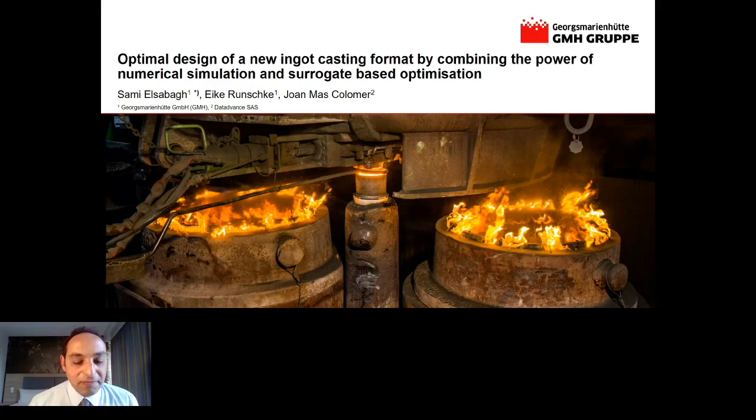Who are we? We are a steel-making plant. Not only a steel-making plant, but we are a big group with a lot of producing business units. We are 100% privately managed, working internationally in more than 50 countries. Due to the 100% use of steel scrap in the electric arc furnace, we have a low carbon footprint in our steel production. With 6,000 employees, we have a 2 billion euros turnover.

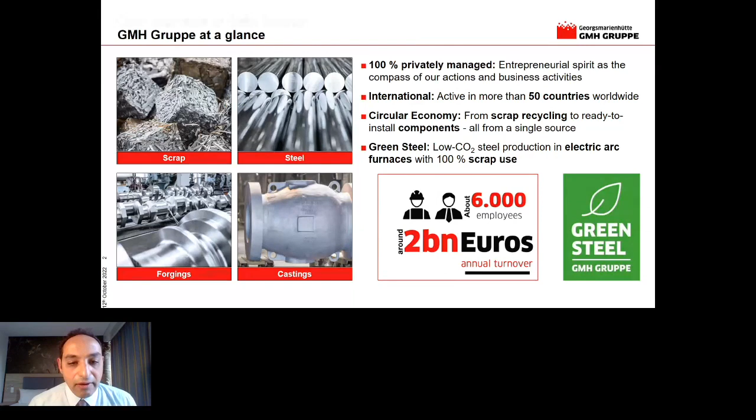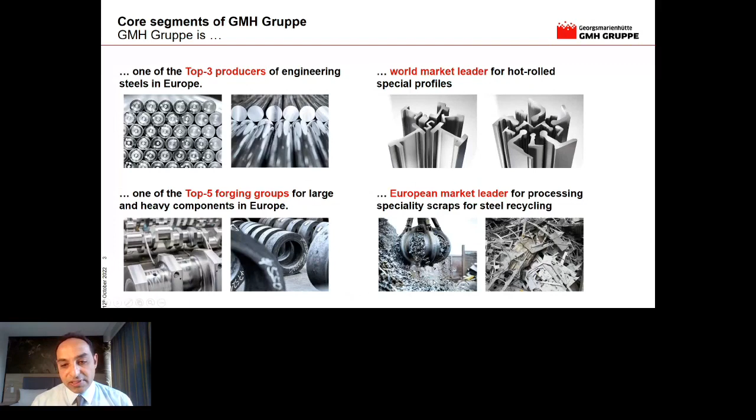We are a producer of engineering steel and special profiles, and we produce also heavy components, which are castings or forgings. As well as that, we are specialists for processing specialty scraps for steel recycling. The markets where we are active are mainly automotive, energy, transport, logistics, railway, consumer goods, and food industry.

Like the label of Intel Inside on your computer, you should say one of 4 or 5 cars you can have the label GMH Inside. 4 or 5 cars contain steel made by GMH Gruppe. We are located, as Laurent introduced, in Germany by Osnabrück as a steel maker. These are our locations worldwide.

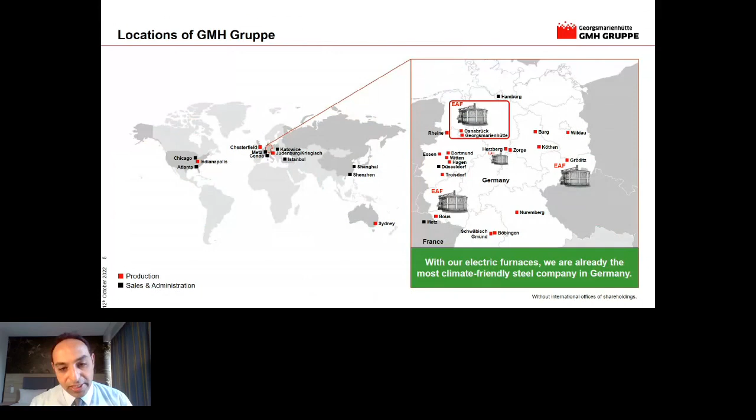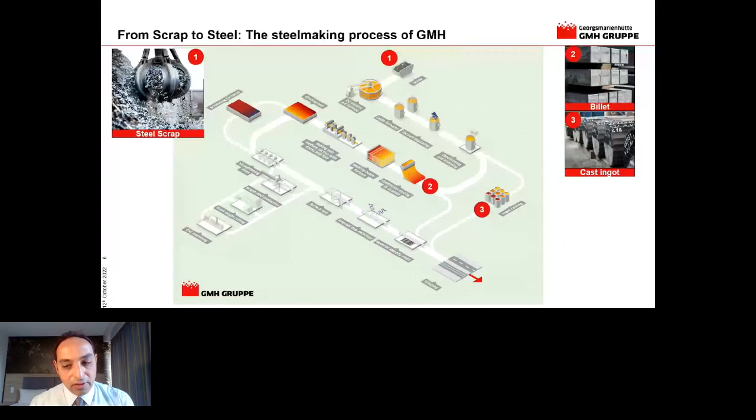In our process locally at Georgsmarienhütte GmbH or GMH, we produce our steel by recycling steel scrap in the electric arc furnace. The liquid, after the secondary metallurgical treatment, we produce cast billets and as-cast ingots, which are partially going to the customers for processing, but also we produce steel bars in our rolling mill, which are either as-rolled or heat treated or as bright bars.

Our focus today is the ingot casting of steel, where we have to propose a new ingot design for our customer and propose a feasible geometry respecting the process itself and the customer's requirements and constraints. We want to create a healthy part and high metallic yield, and avoid and minimize - that is the very important thing - trial and error on the real product itself. So we want to do a digital optimization with numerical simulation.

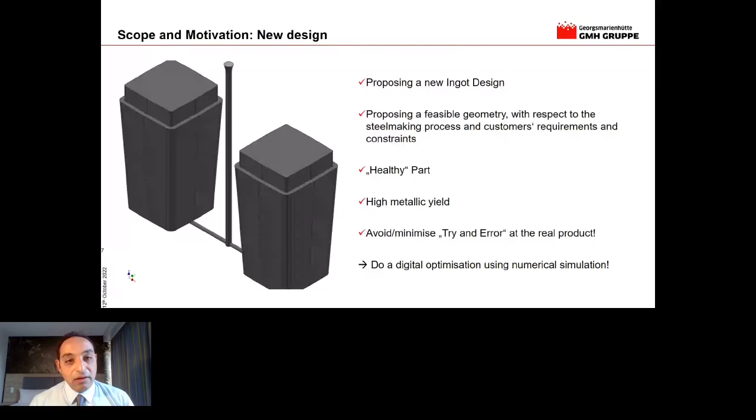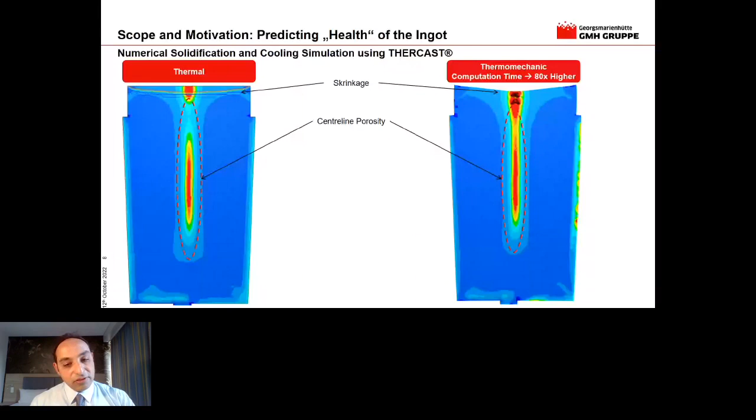Using THERCAST, we can model and forecast or predict the shrinkage behavior of the solidified part, as well as model the centerline porosity. Other attributes which we can model or simulate with THERCAST are segregation, ghost lines, and hot tearing.

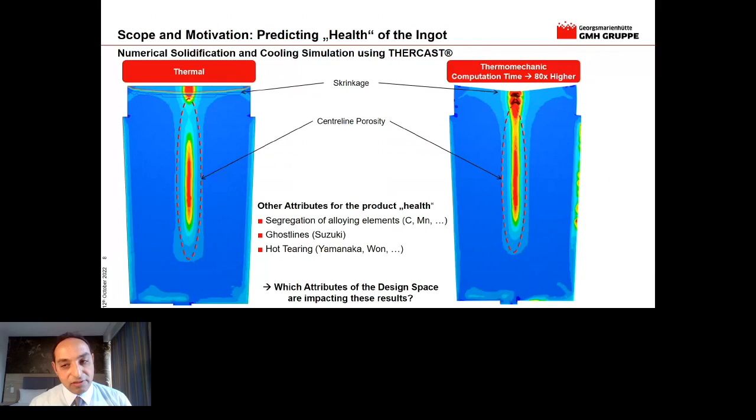But the point is, that is all fine. But which attributes or process parameters in the design space impact these results? That is actually the point which we are talking about. If we have such a simulated part, what is the design space to be investigated?

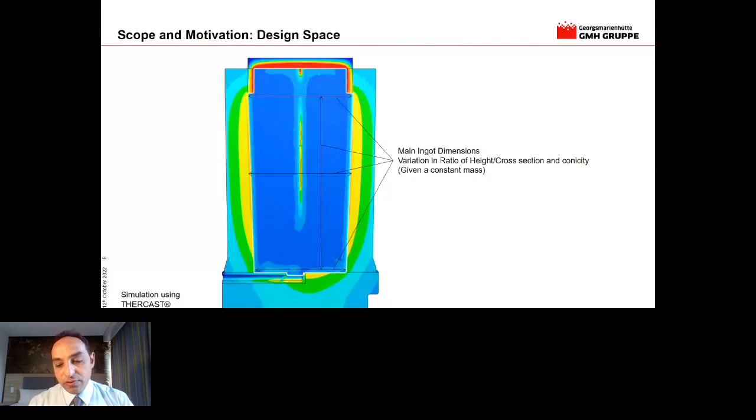The ingot dimensions: given a constant mass, we speak about 5 tons, 10 tons, 30, 40, whatever tons. If you vary the dimensions, you vary the behavior or influence of the height-to-cross-sectional ratio, conicity of the geometry of the mold, the riser dimensions, the insulation dimensions, as well as their thermal properties, given process data like the steel grade, the mass flow rate during pouring, superheat, and so on. That's all nice.

What you see, the colored photo in front of you, is just one single configuration of the geometry, process parameters, thermal properties, and boundary conditions. So we want to explore the design space and optimize this process.

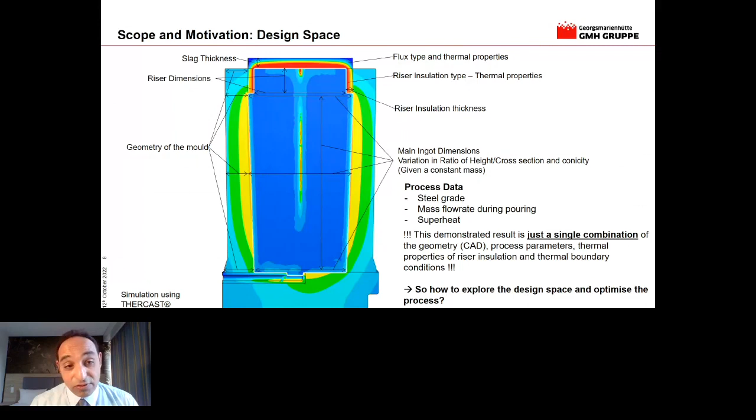How to do this? If we talk about design of experiments, we talk about two-stage full factorial design. Two-stage means that every parameter has a low value and a high value. What happens if I investigate 2 parameters? I have 4 virtual experiments. If I have 4, I have 16 experiments, and so on. So it's getting too much. With the previously mentioned parameters, we are talking about more than 16,000 simulations to be done to investigate this design space

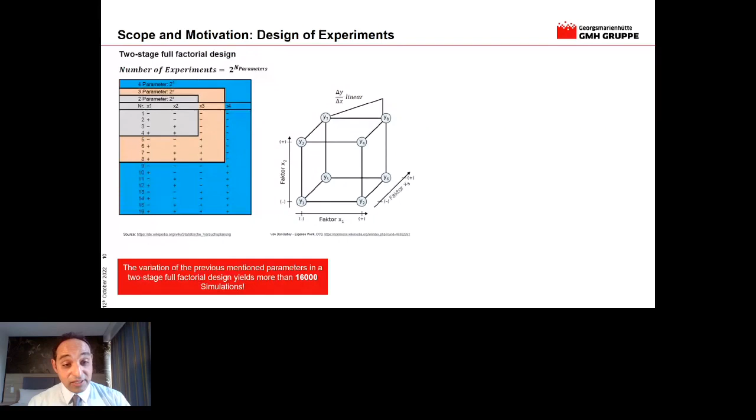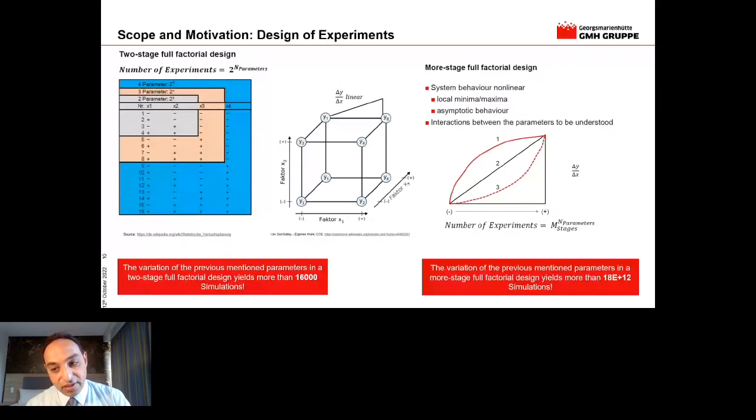just like this. And when we talk about processes with a non-linear behavior, with minima, maxima, asymptotic behaviors, how the parameters are interacting together, then we are talking about billions of probabilities to be investigated. So that's what we did together with DATADVANCE and GMH, to use pSeven as the mind of the whole workflow.

We have Inventor for CAD and THERCAST for the meshing setup and the real numerical computation itself. We consider this as a black box, and pSeven does the design space exploration, gives the parameters, does the control and the triggering of all of the workflow, and gathers the responses at the end of each simulation, all in an automated closed loop.

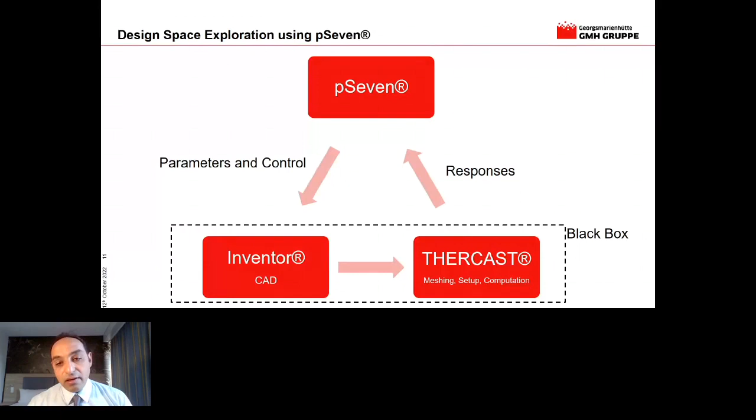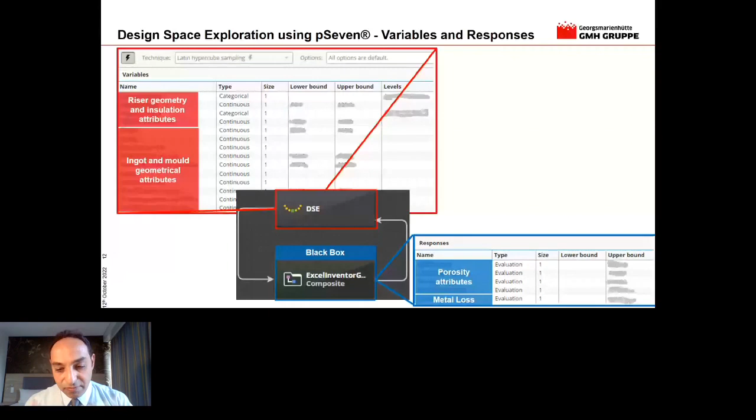And it is done like this: we have variables and responses. Variables like riser geometry, insulation attributes, other geometrical attributes and other process data; they can be hundreds, but you have to define them. You have a lower bound and an upper bound, you can define the bounds, the levels in case of categorical variables, and then send this configuration to the before mentioned black box. Then from this black box you gather the responses, like porosity attributes, metal loss, and so on.

In detail it looks like this. If I look into the black box, we submit the input, the design variables, the CAD is triggered, the geometry is produced, the meshing, the parametrization, the solidification simulation, and afterwards the parameter documentation, data acquisition, analysis, and these responses are gathered from the black box back to the design space exploration of pSeven for deciding the next iteration.

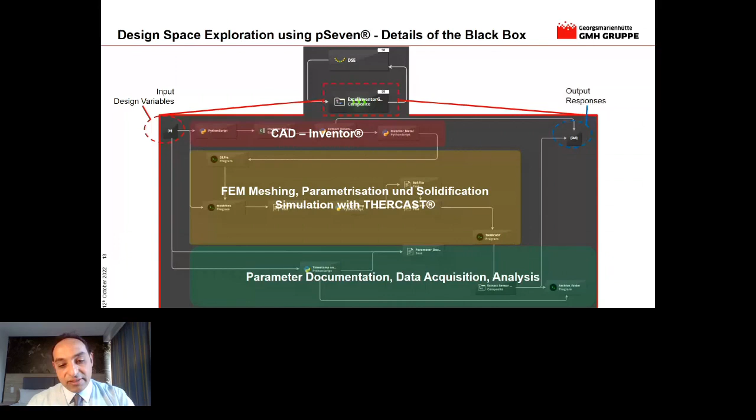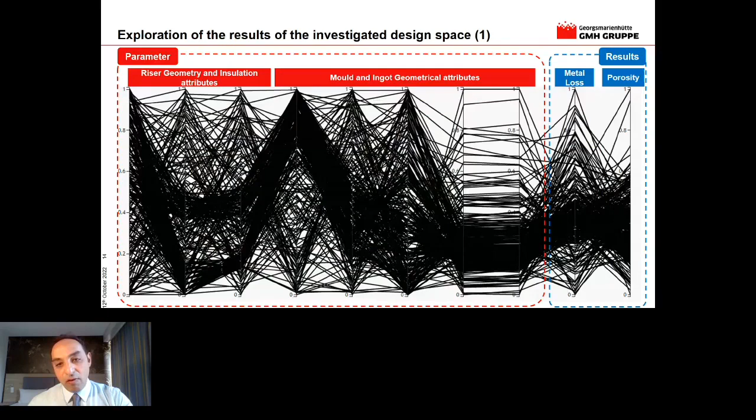And the nice thing: these are 350 simulations done in this workflow, and we have the possibility to explore the results of this investigated design space. We have the parameters which we vary, we have the responses which we gather, and we can have a look and understand what happens, which results are bad in terms of porosity or health of the product, and which are good.

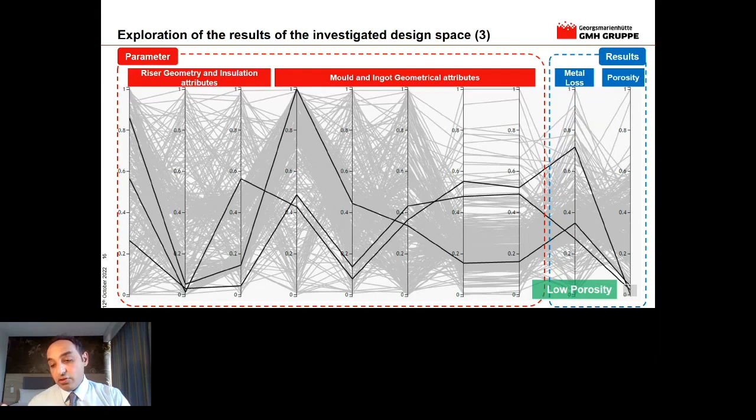And we see that we have the possibility in our optimization to find good porosity and also optimize the metallic yield, and understand which parameters are relevant, how they interact together, and which parameters are not really so relevant, whatever variation we do. That is an important thing for us to understand as engineers. I make hundreds of simulations; how do I understand what I did at the end, all at one glance?

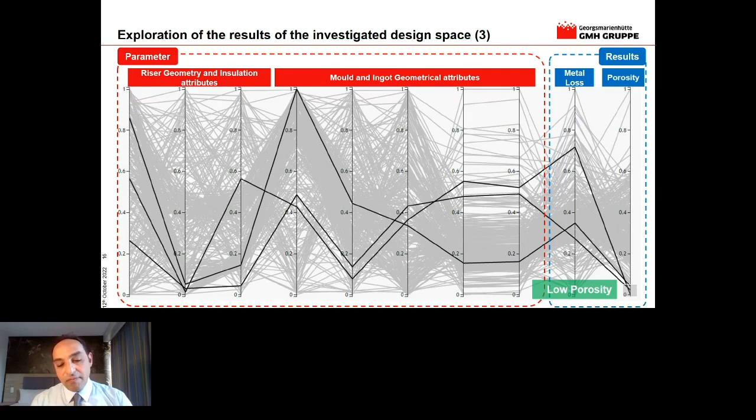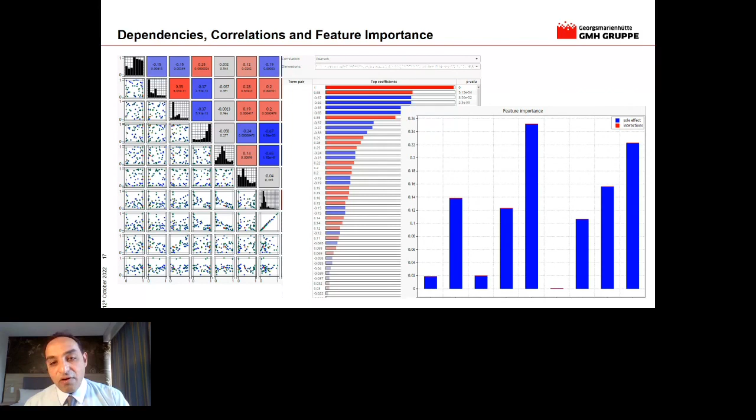Other possibilities which we get and use from pSeven are to analyze the dependencies, the correlation, and the feature importance. Is the investigated feature really important, or can we just neglect it? And understand the dependencies, how they correlate together, and go further and have an understanding and a feeling for what I am designing.

And then we get to the next step, which is more or less the final one, the surrogate-based optimization. Instead of just evaluating the responses, we say we want to minimize the porosity attributes, the metal loss, whatever criteria we have, and get our final design.

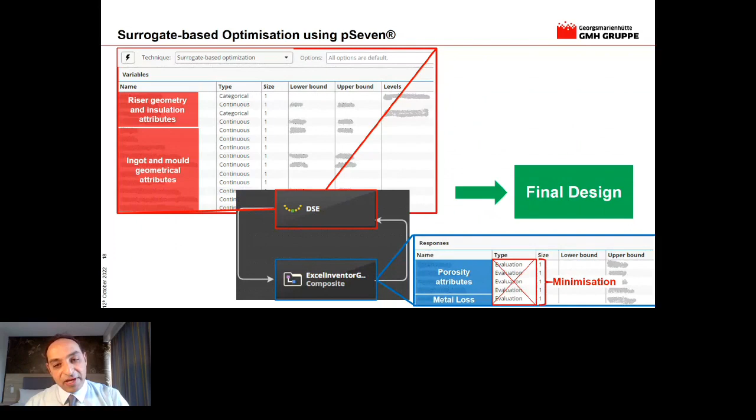So concluding: using a numerical simulation, we can predict the solidification and the quality of the ingot. Using pSeven for design space exploration and optimization, we can automatically trigger the workflow in a closed loop and save human time and idle times of the server. It means it runs 24/7. Understand the relevance and the interactions of the parameters.

We did an optimization with 350 computations, and can gain an understanding and get an optimization in less than 3 weeks. And when we combine the power of numerical simulation and surrogate-based optimization, we have a deep understanding of the process and development of products with optimized qualities and costs in record time.

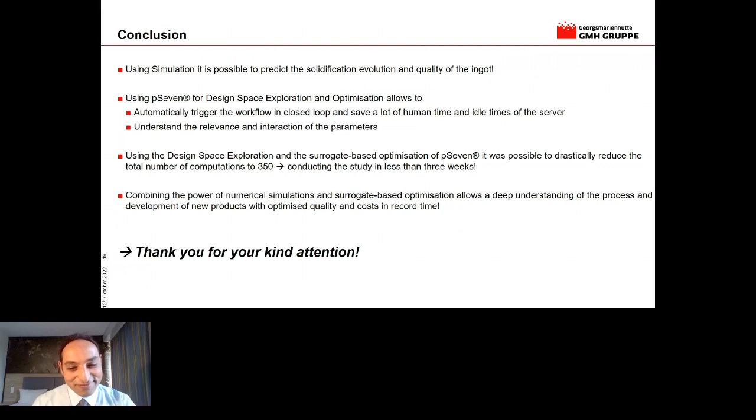In your presentation, you use the CAD Inventor. Yes. But how easily could you use another CAD tool? It is a matter of licensing. So it doesn't matter if you're talking about CATIA or Inventor, and so on. We have a simulation team, but we are not the only people using CAD. There are other departments using CAD. So this is a thing which you have to decide as a company.

If you have a big team and most people are using Inventor, then you have to orient to Inventor. And if the main philosophy is to say let's all work with CATIA, then the point is: which resources do I have? Can I get them? What is better for all? I took Inventor because it was available, and if you are talking with construction departments who are not doing simulation but construction, it makes the data exchange easier. I did it because it was there. Okay. It means that if you add another tool, it's easy to replace it within pSeven. Yeah.